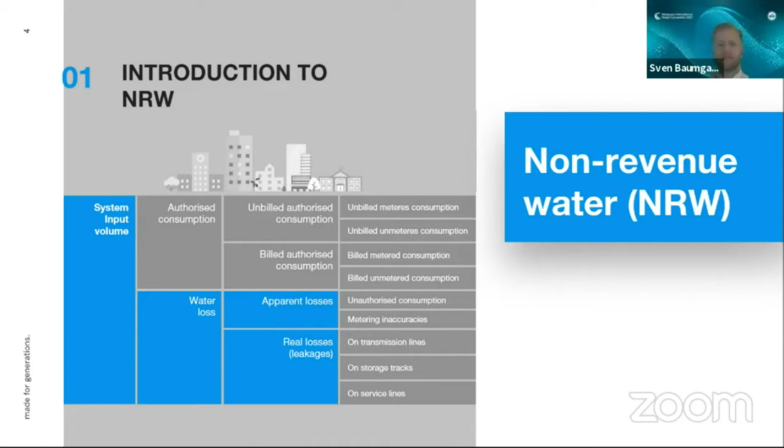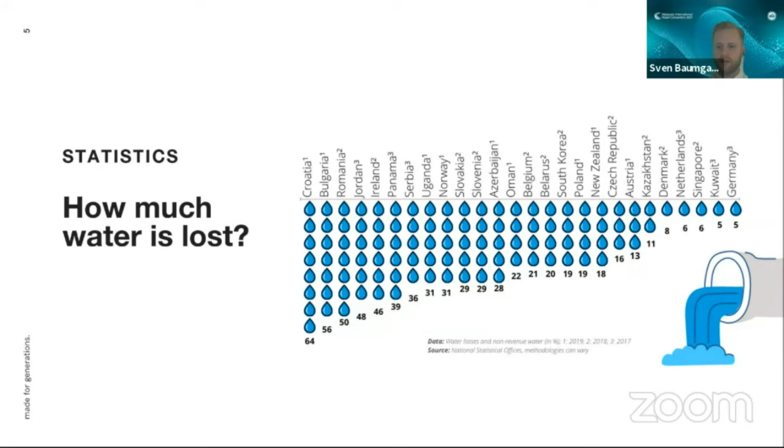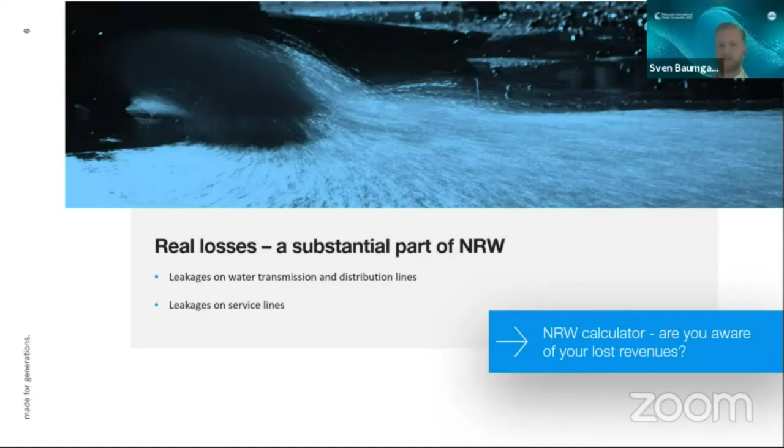Basically, there are three different types of leakages. As I mentioned, the big leakages on transmission lines, where a pipe breaks or a valve is not working. Those are reported leakages because water authorities will immediately know. You have a huge pressure reduction in the pipeline, you immediately know something is wrong, and you have to react very quickly.

What is more tricky are the unreported leakages. Sometimes you can detect them, sometimes not. This depends on the position in the pipeline where they occur. You also have pressure reduction. There are different tools for leakage detection and different solutions on the market. But as I said, sometimes you can't detect those either.

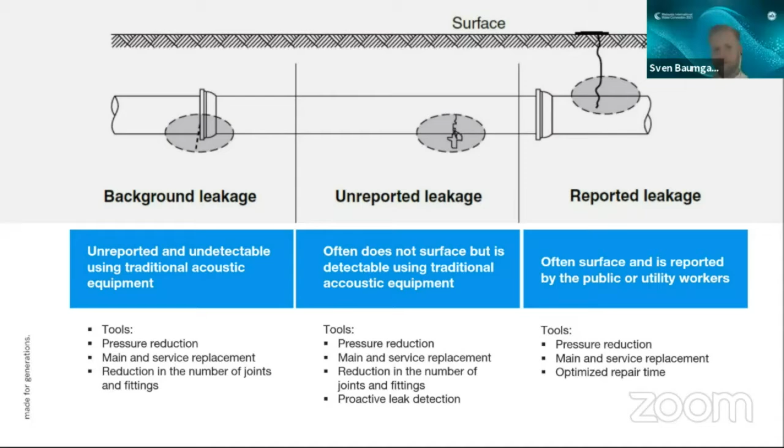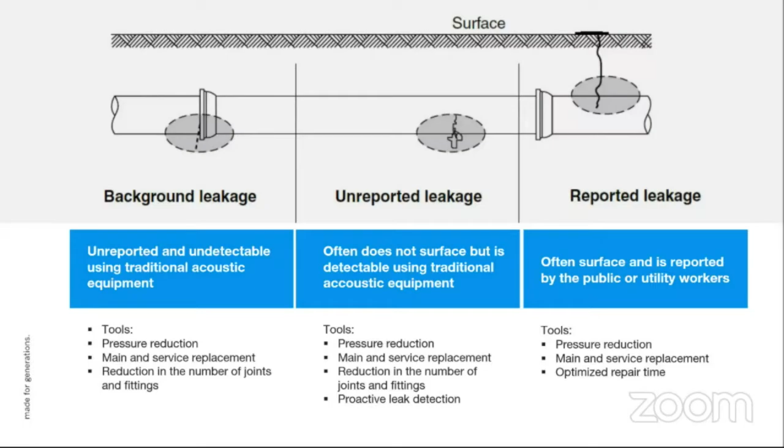And then what is really interesting are the background leakages. They are unreported and also undetectable with traditional acoustic equipment and traditional solutions. But those leakages can cause huge trouble over time. They cost over time. The small leakages can cause the collapse of roads and pavements. So it's very crucial to focus on those areas. Here as well, the main source of those leakages is the house connections, meaning the saddles, service valves, and service pipelines.

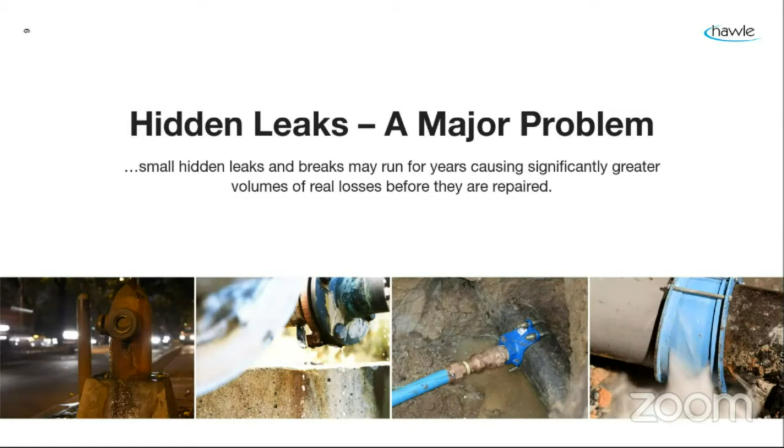To give you a quick overview of the non-revenue water calculator, as a first step for water authorities to quantify non-revenue water: basically, we've taken different potential leakage sizes, the water flow, the water rates, and roughly the average water price. So you already have an idea, with different pressure ratings, of the average loss every year, and how much money is lost every year.

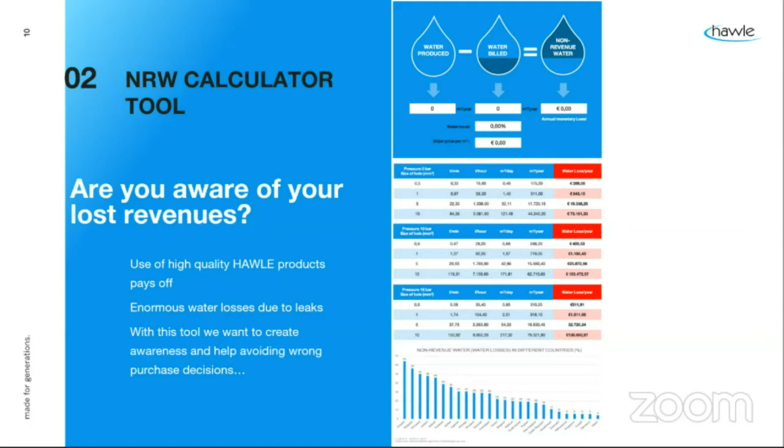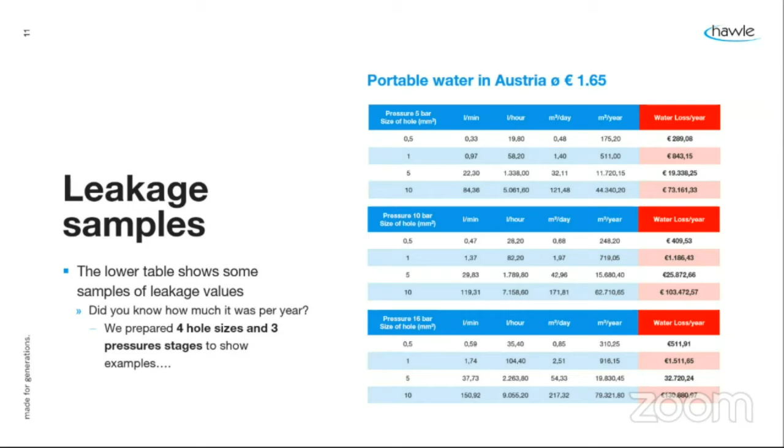Here's an example of Austria with a water price of 1.65, where you see, okay, with 5 bar, with 10 bar, with 16 bar, and then also the size of the hole. So from 0.5 square millimeter, how much money do I lose? And then you can see the bigger the hole gets. It's still very small holes, but just a few differences, how much money can be lost every year with those small leakages.

Here you can see the non-revenue water calculator, where basically you put in how much water you produce every year, how much water you bill every year, roughly your water loss percentage, and of course your water price, and then you get as an outcome an annual monetary loss. And with this number you can say, okay, right now I have 30% water loss, non-revenue water. How much money do I save if I just reduce this by 1%, by 2%, because I use higher quality products and different solutions, especially on the house connection area.

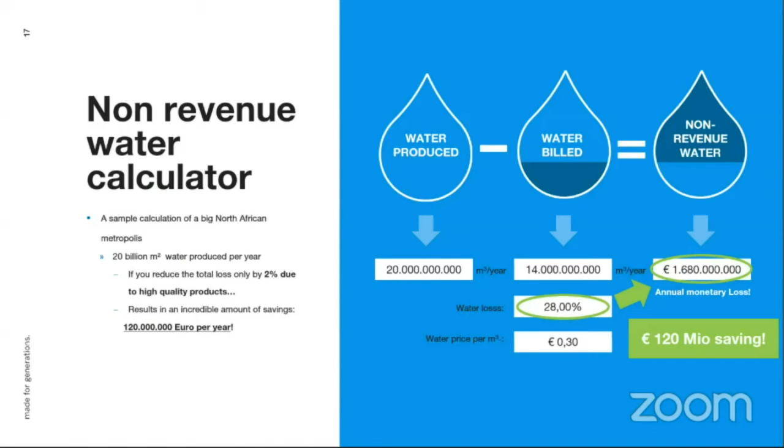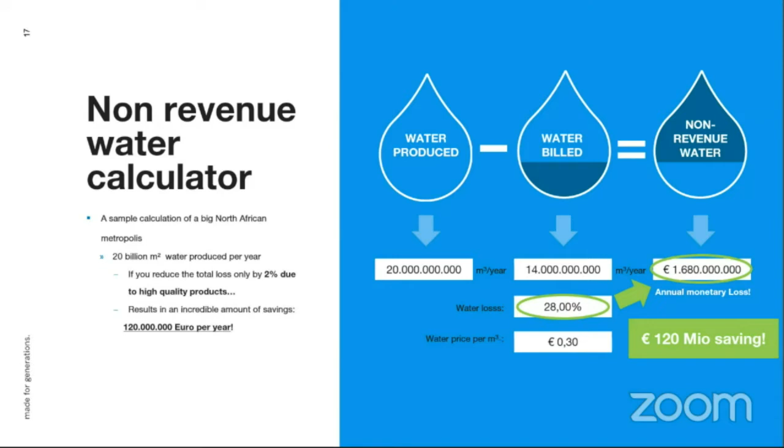And here you can see just by 2%, you already save 120 million euros every year, which is a huge saving. And with this saving, of course, you can invest in higher quality products, which in the long run will save you water and eventually also money. And for us specifically as the Hawle group, as a manufacturer of valves and fittings from the source until the house, we give a 10 years full warranty on the products, and this adds up as well, and your savings are even higher because the products are fully covered for at least 10 years.

Now I want to present you some solutions from our side, to give you an idea where the current systems can be changed and different solutions can be used. As I mentioned, we are a manufacturer of valves and fittings. So basically we manufacture from the source until the house connection all types of valves, of pipe connections, and we have digital solutions as well. I would like to give you an overview.

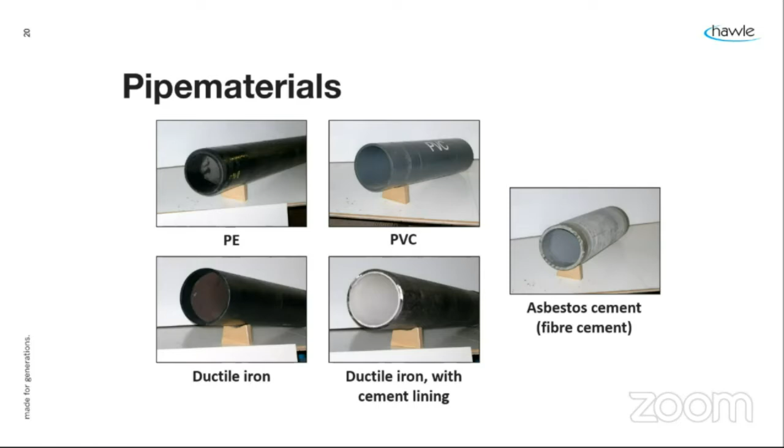Pipe materials, of course, are different. On the market, there are different types of pipes, and it's hard when you have to repair pipelines with different materials. How to do it? You can't weld because maybe you have a steel pipe that needs to be connected with PE, and so on. So we have a multi-range coupling that can fit all common types of pipes. It's very easy to install. It's reliable, and it's reducing costs because it's very efficient. In a few minutes, this is installed. There is no leakage, and you can connect different types of pipes.

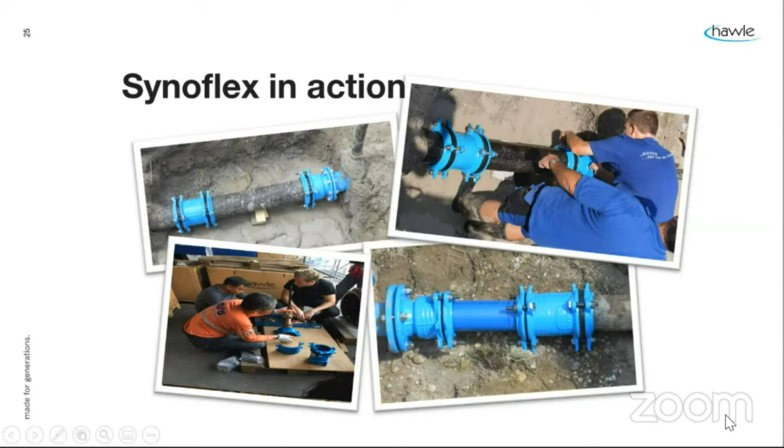I was lost. So here, basically, you see the product in action. As I mentioned, mainly used for repair work, where you have to connect old pipes and new pipes. A dedicated product is the Syno 2000, where you have on one side the multi-range connection for any type of pipe, and on the other side a dedicated PE pipe socket, as new pipes are usually mainly PE or PVC.

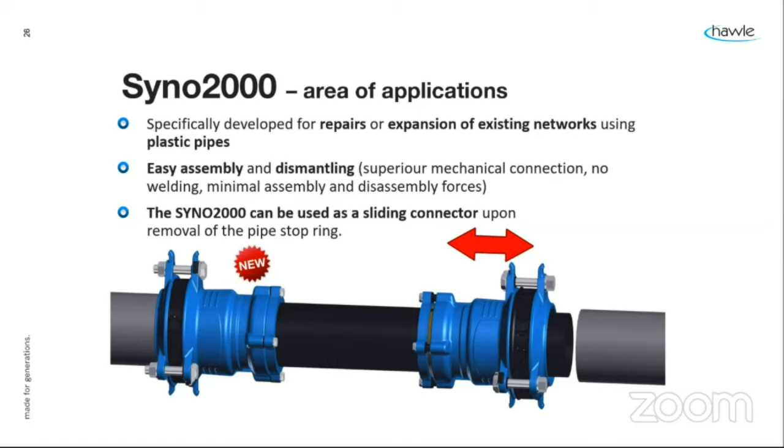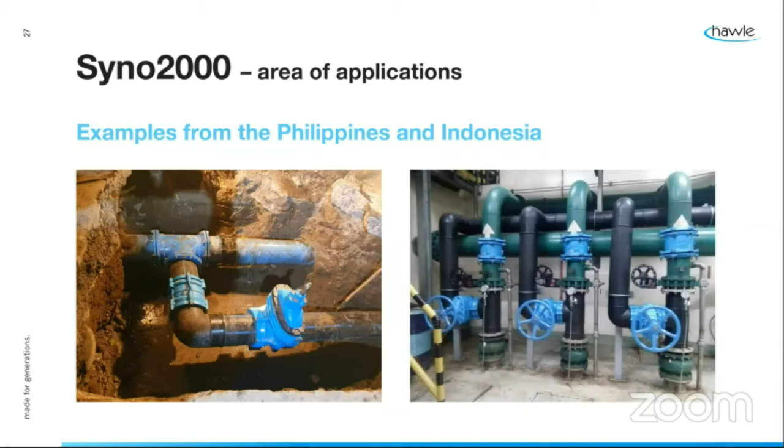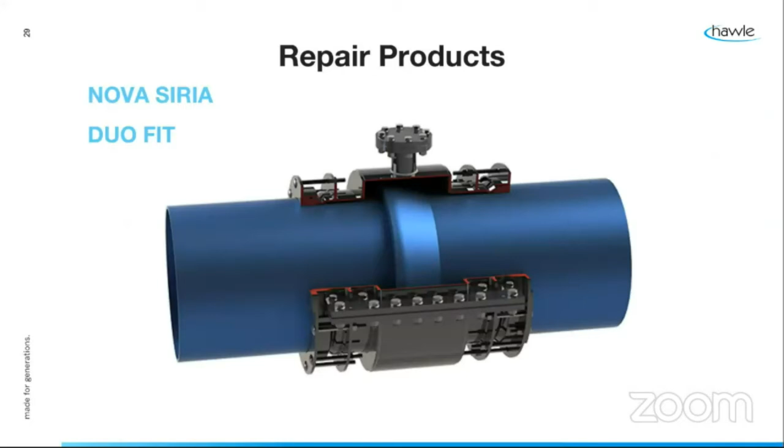Another product we have is encapsulation collars. This product is mainly used for the big transmission lines. When you have big leakages where you have to react very fast, we have a repair product that is basically an encapsulation collar. You put it on top of the pipe and immediately cover the leakage, and you don't have to shut down your pipeline. This is saving you time, saving you money. The customers are not without water, they still have water in their houses, and you can be very efficient with this product as well.

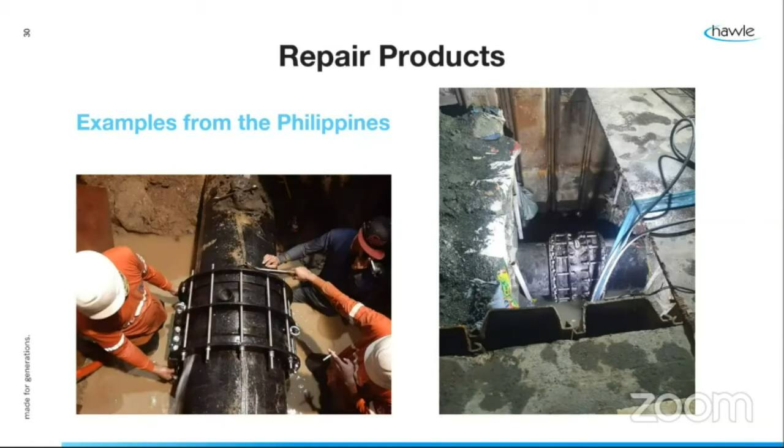Then the most crucial part for the small leakages are the house connections. Traditional ways is a threaded connection from the pipe, maybe via a saddle, or immediately a thread drilled into the pipe, and then having a normally brass metal valve, and then you go with the smaller service pipes to the houses. Of course, thread is always a risk for corrosion. You have blank spots, and then the leakages start, and then you have the small leakages you don't detect, and they will create big problems.

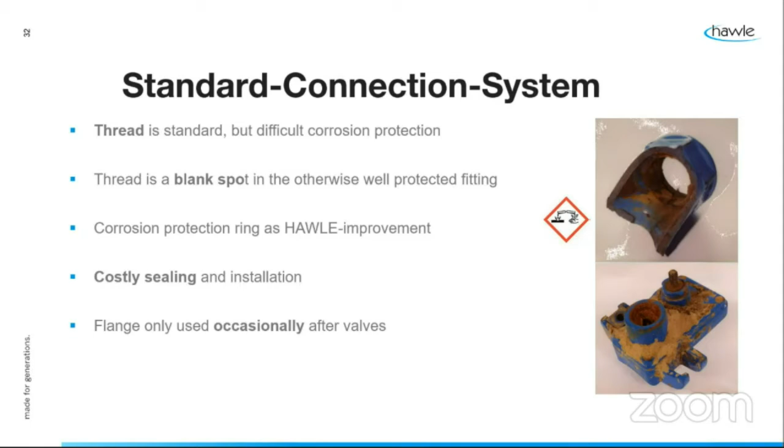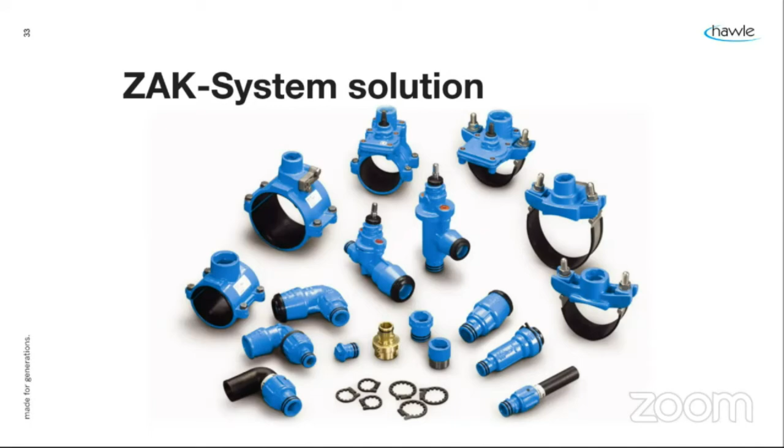We have created a so-called ZAK system. It's a bayonet system. You don't have any blank spots. It's just push in, very easy to install, and you basically have zero risk of any leakages on those connections. As you can see here, the installation is very easy, very quick, and you don't have any blank spots, and you can be very relaxed when you install those products, because there is 0% leakage.

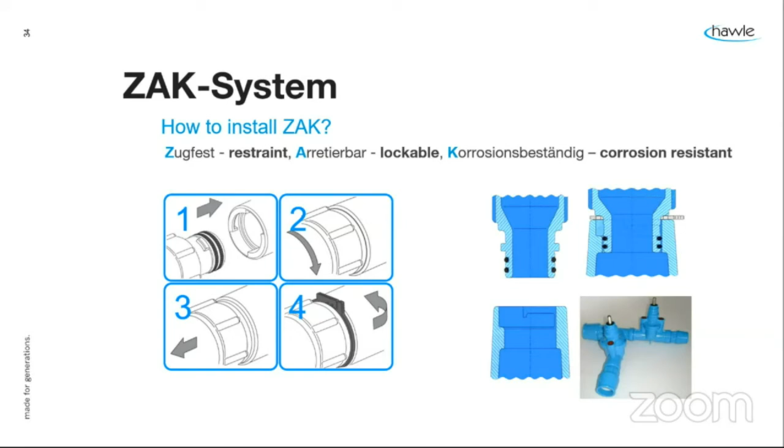Also for the employees, very easy to install. As I mentioned, it's basically just pushing in, and threadless, and you have a 100% sealing, because it's designed with the double O-ring, where one O-ring is basically just for protection.

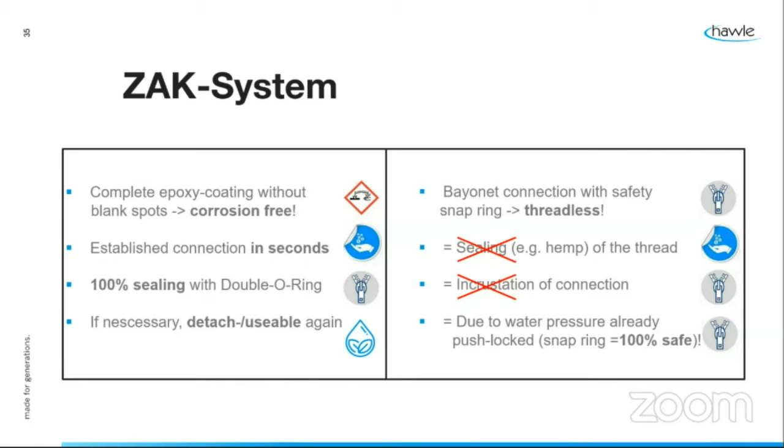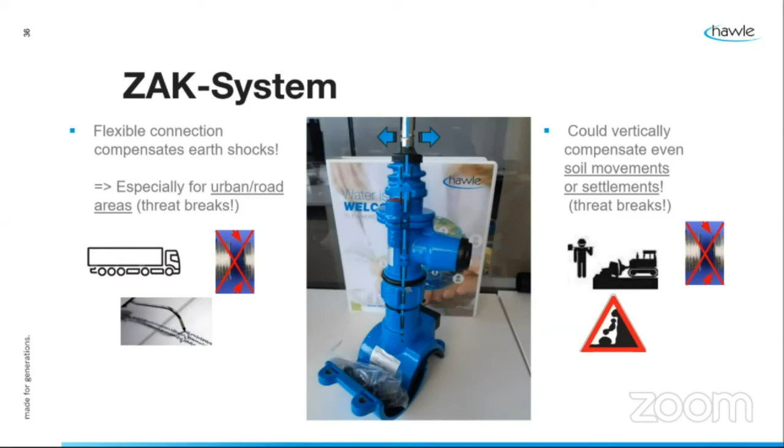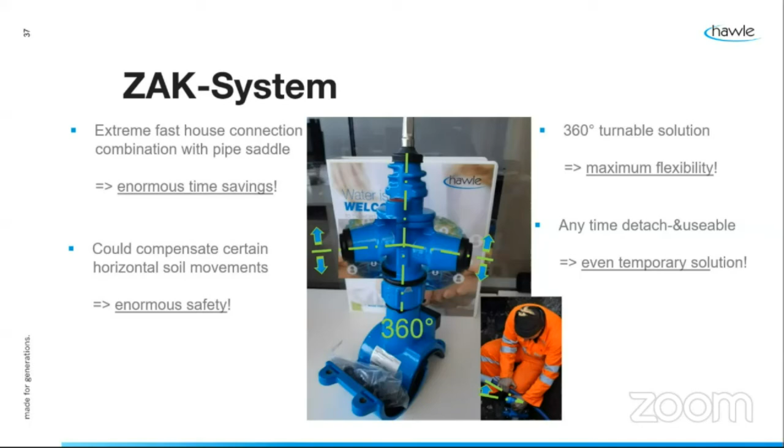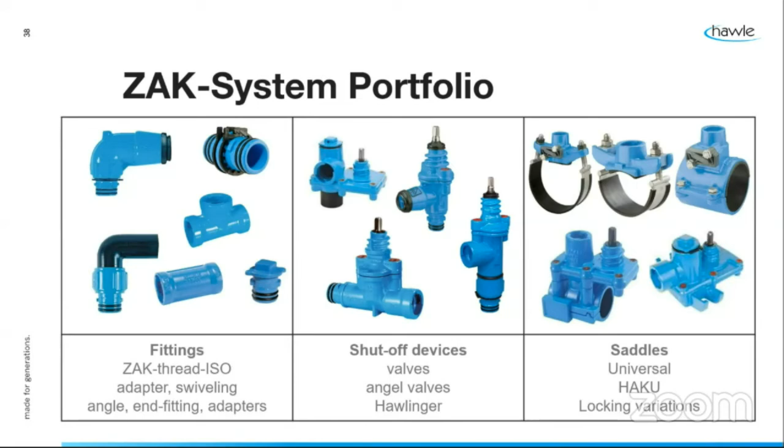Different models, so you have different types of saddles for different types of pipes, different versions of the service valves then, which are installed on top of it. So you're also very flexible depending on your needs and on the actual application. Very flexible, and therefore very time saving, and you can react on different applications. As I mentioned, the portfolio is very big. We have saddles, we have the shut-off devices, the valves, and of course we have different types of fittings for the smaller pipes.

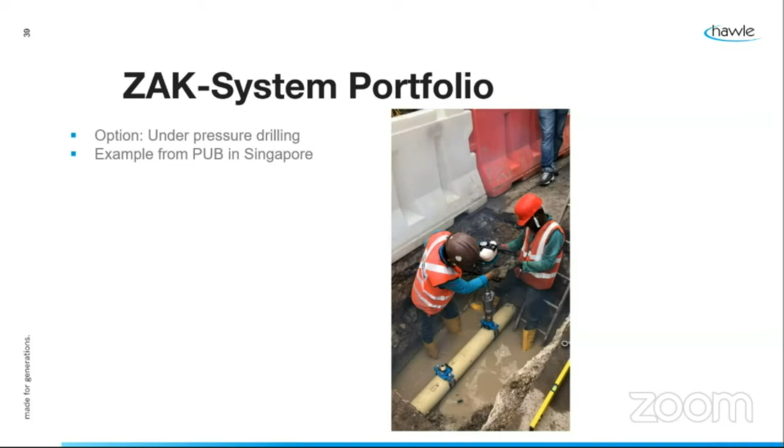Here is one example of an under pressure drilling done by PUB in Singapore. So basically they used our saddles and the service valves for the house connections for a certain section where they had to be very fast. So the distribution line, there was no shut off. It was an under pressure drilling, and of course, after monitoring it over half a year, there was no issue, no risk. Comparing their traditional method, normally after 1 or 2 months, when they check, they already can see some small leakages. Also done very easy. So the training of those 2 employees took 1 hour beforehand, and then they were already ready to do it themselves.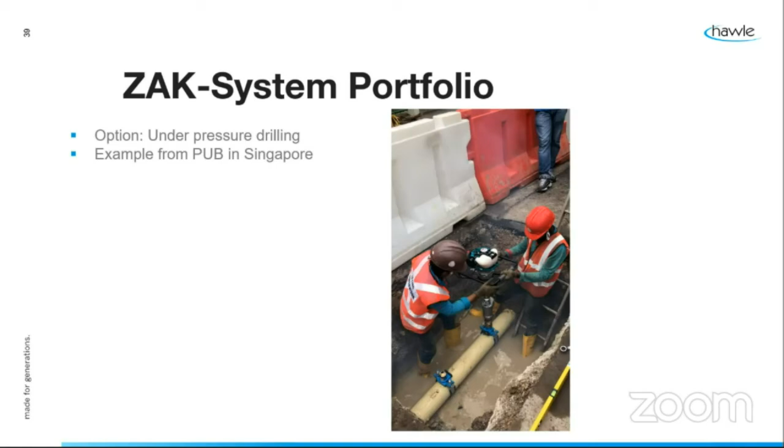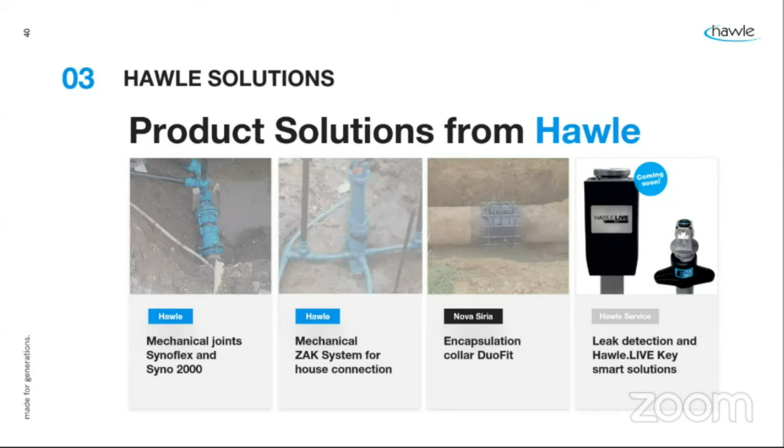Very efficient. And to conclude my presentation, I would like to just give an overview on our digital solutions. So of course, we're also focusing on the digital part in tackling non-revenue water. And we have our own company as a startup, which is just focusing on different solutions. So we have created a Hawle Map. It's basically connected to Google Maps, where you can track your products in this application. Are the products functioning? Are they not functioning? What is the nearest hydrant, which especially in Europe is very important, because hydrants by law need to be close to certain areas. You always need to have them accessible.

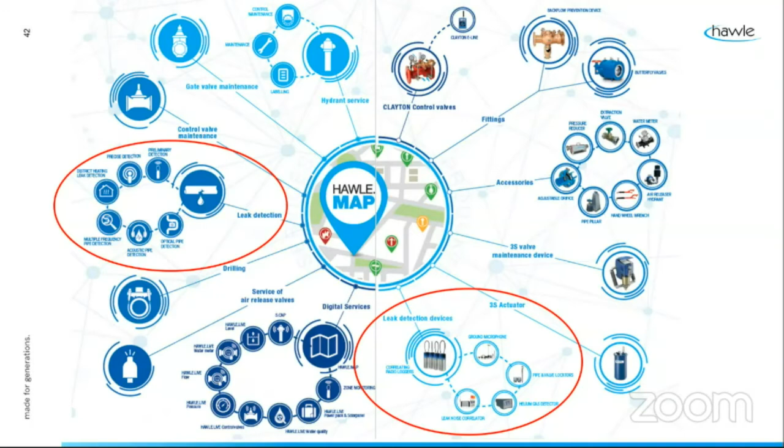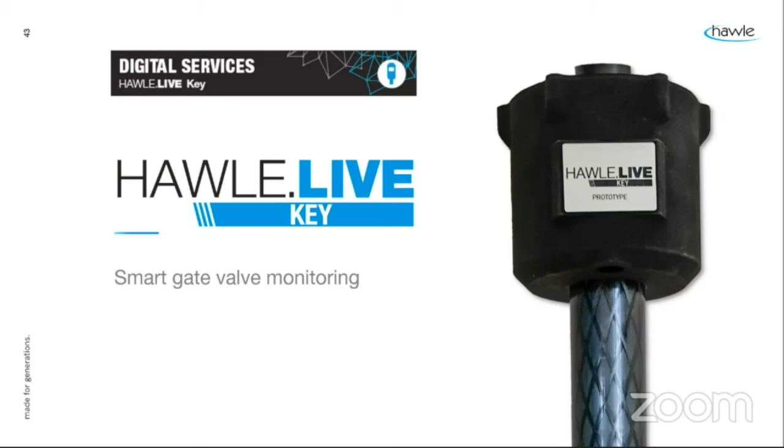And another big topic, of course, is then the actual leak detection, where also we have some devices for the traditional methods. As I mentioned, in this Hawle Map you have your products, and you know where they are located, are they working, or when were they used the last time. And we have created an additional device. It's called Hawle.LIVE Key, and it's basically a smart gate valve monitoring. So with this product, the employee goes on site, he checks his phone. He knows, okay, there is a gate valve. He has to check it, or it has to be closed because of some repair work. So he already knows it by using the Hawle Map, and then he uses the Hawle.LIVE Key to operate it.

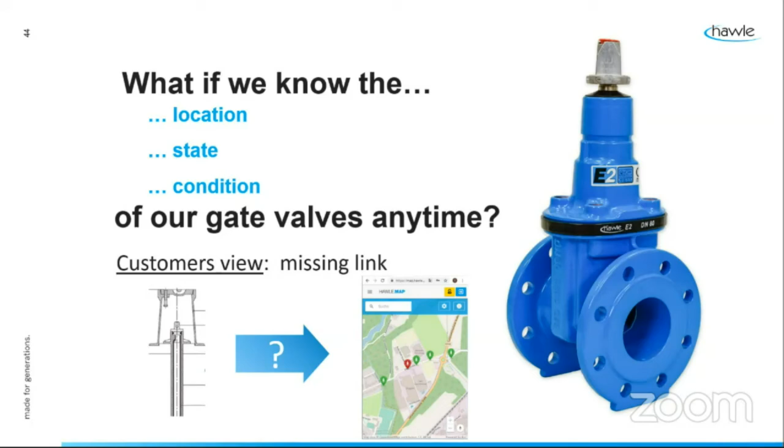And then also, as a utility, you then get a report. So you know, okay, this gate valve was operated, it worked, you have it in your system, and you're always up to date. The features: it can be used for any type of gate valve, so it doesn't need to be from us. It's very easy with the ratchet or also actuator. It has an intelligent status bar, I will show you on the next slide. And of course, it has the integration into the Hawle Map.

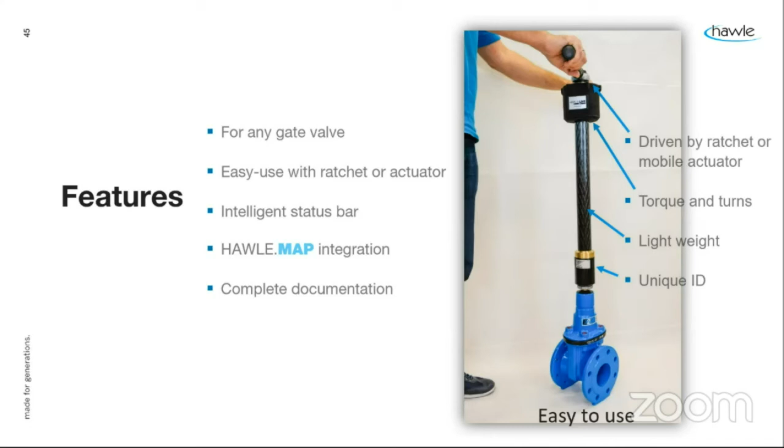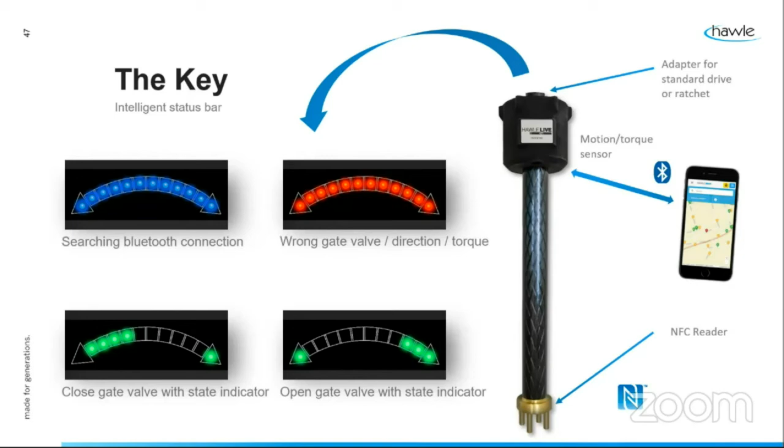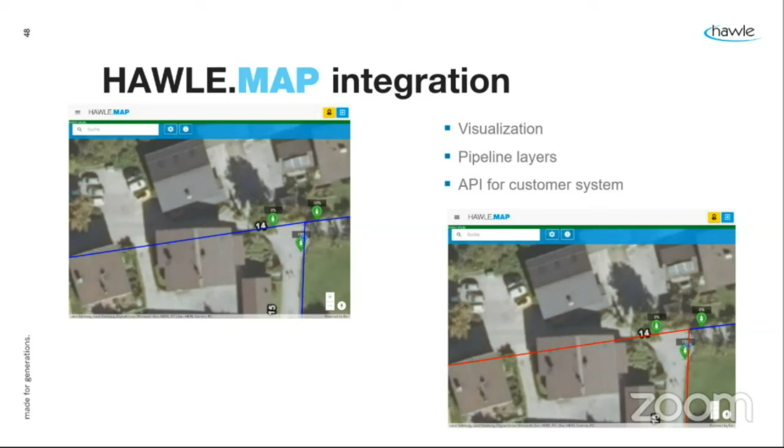So for the employee using the key, he has different types of indications, where he can see, okay, is it closed? Is it open? Maybe wrong gate valve or wrong direction. So he gets an idea as well. Then the integration into our Hawle Map is very important for the visualization. You are live 24/7, you have the live feedback, and you always know what's going on in your water network.

And basically the workflow is the office looks into the Hawle Map, creates a workflow, creates some tasks, some checking of gate valves. And this goes then on the phone of the employee on site. They are using the LiveKey, operating it, and the report goes back to the office. And it's always reported. It can always be looked into, and it's basically always a live feedback.

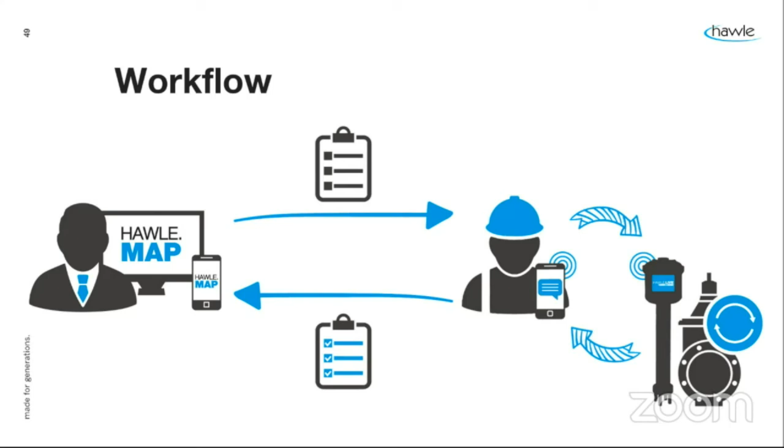Well, that was it. And as Benjamin Franklin said, when the well is dry, we know the worth of water. So it's very important to focus on non-revenue water, and I hope you enjoyed the presentation.